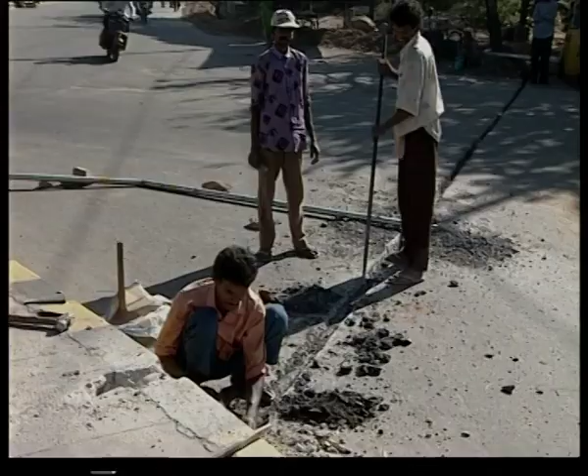Due to rapid industrialization and migration of people from rural areas, cities have grown phenomenally, leading to an enormous increase in urban population. The municipal authorities are finding it very difficult to provide basic necessities, especially water, to these multitudes. Whether a city rises skywards or spreads horizontally, the demand for water is bound to increase.

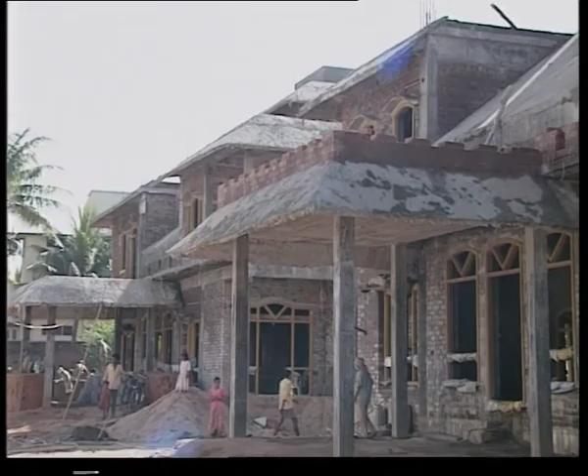Addition of one more industry or yet another residential colony to the already strained water supply system of the city will be like the proverbial last straw on the camel's back. When the system fails to cope, individual house owners start rigging up bore wells.

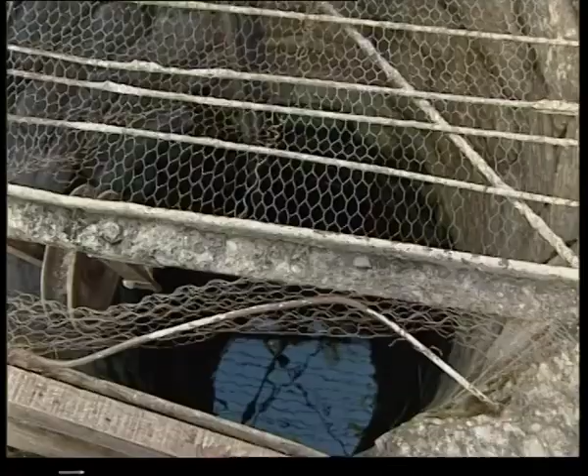In normal conditions, groundwater gets recharged naturally. During the rainy season, rainwater percolates into the ground and replenishes the water table. A replenished water table provides sustenance to open wells and surface water bodies. When we have more bore wells, more groundwater is pumped up.

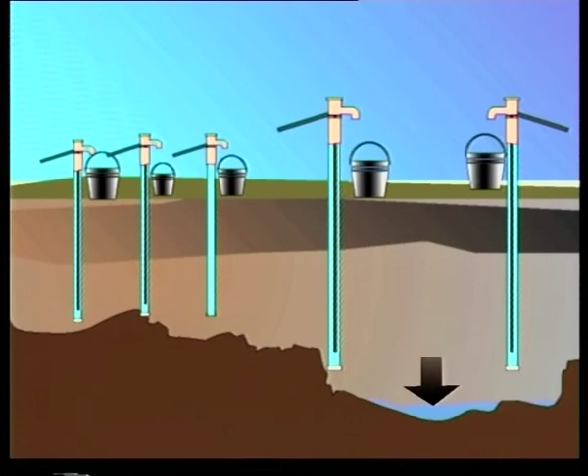When it is overexploited, the underground water level drops substantially, and natural recharging of groundwater fails to replenish it.

Urbanization has added yet another dimension to the problem. More and more open spaces in towns and cities are getting cemented, concretized or bituminized to form roads, pavements, runways or parking lots.

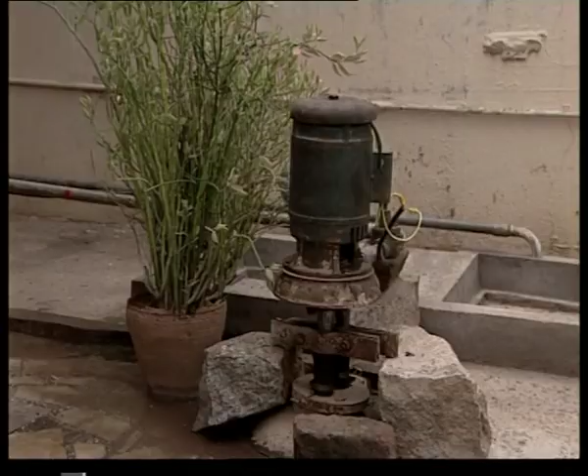Cemented or bituminized surfaces do not allow runoff rainwater to percolate into the ground. Due to this, the quantum of natural recharge of groundwater gets reduced considerably. As a result, bore wells fail to yield any more water and the open wells go dry.

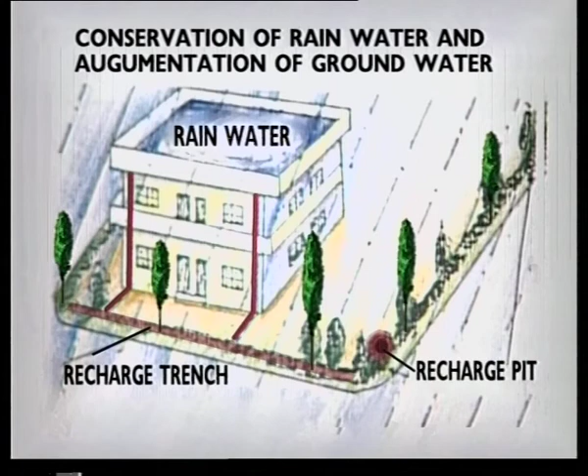The majority of our urban areas are facing this problem at present. To overcome this, the Groundwater Department in Andhra Pradesh has initiated a project to artificially recharge groundwater. Artificial recharge means augmenting the natural percolation of rainwater into underground formations by man-made methods.

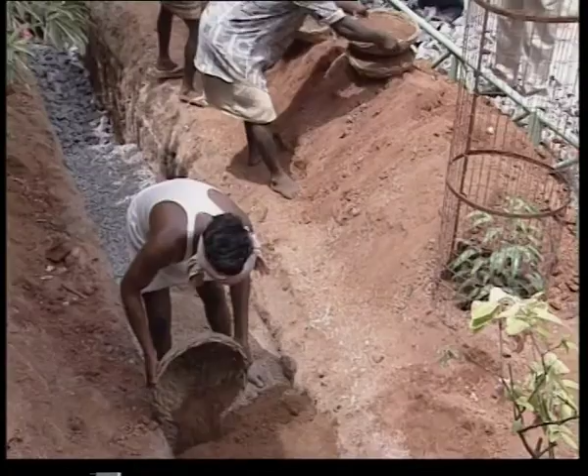The Groundwater Department is implementing this project in collaboration with the Hyderabad Metropolitan Water Supply and Sewerage Board and the Department of Municipal Administration. A simple and low-cost method which can be adopted even by lay people is being popularized to recharge groundwater. In urban areas, large quantities of rainwater get collected on the rooftops of buildings.

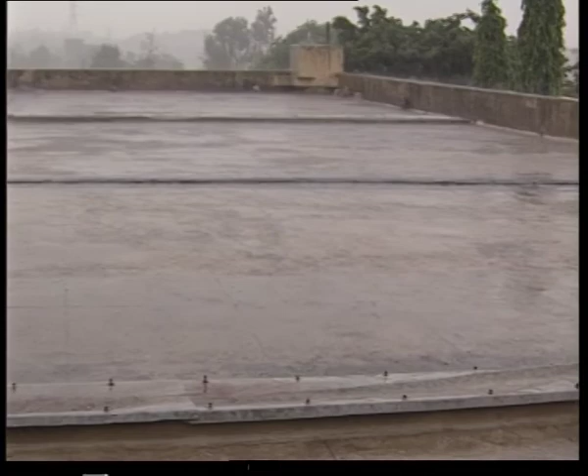Usually, the rainwater collected on the rooftops is allowed, literally, to go down the drain. Instead, this water could be used to augment groundwater recharge.

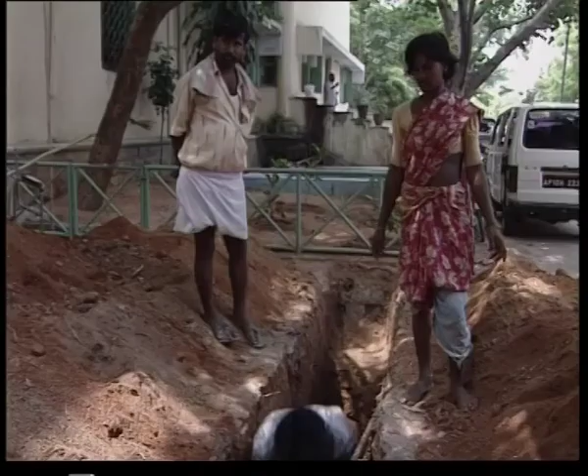Digging longitudinal trenches around the buildings will facilitate artificial recharge. Trenches 0.5 meter to 1 meter wide and 1 to 1.5 meter deep will be adequate for this purpose.

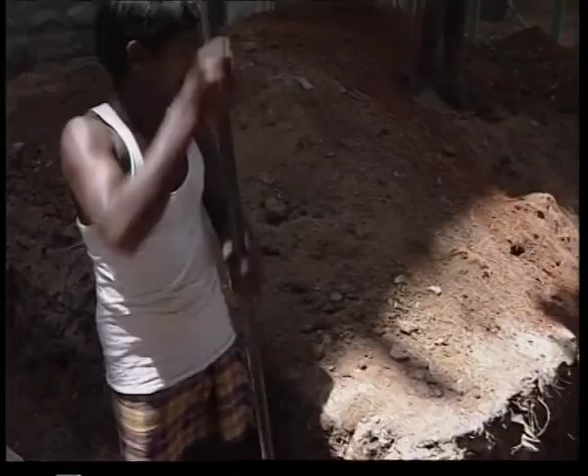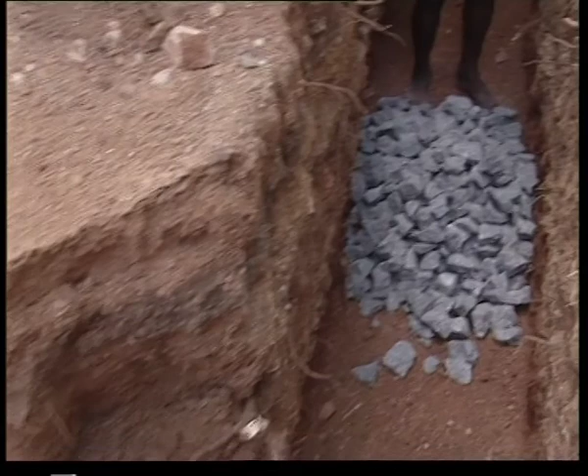Ideally, the trenches must be filled with 3 layers of permeable material. Pebbles of 40 mm metal can be used to fill the bottom layer, which should fill about 50% of the trench.

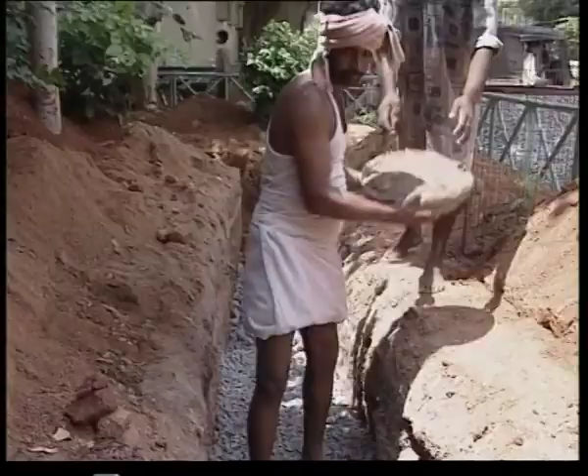The second layer must be filled with gravel or 20 mm metal, filling up to 25% of the space in the trench. The remaining part of the space can be filled with river sand.

The rainwater collected on the rooftop can be allowed to flow into these trenches. These trenches store the rainwater and facilitate percolation of water into the ground. For every 100 square meter rooftop area, a trench with a volume of 6 cubic meters will be sufficient.

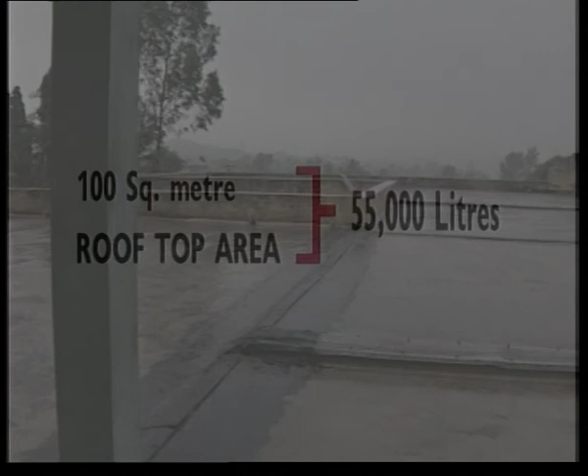The annual rainfall in Hyderabad is around 780 millimeters, wherein a rooftop area of 100 square meters can generate an estimated 55,000 litres of additional recharge. This is likely to meet the water requirement of a 5-member family for about 100 days in a year.

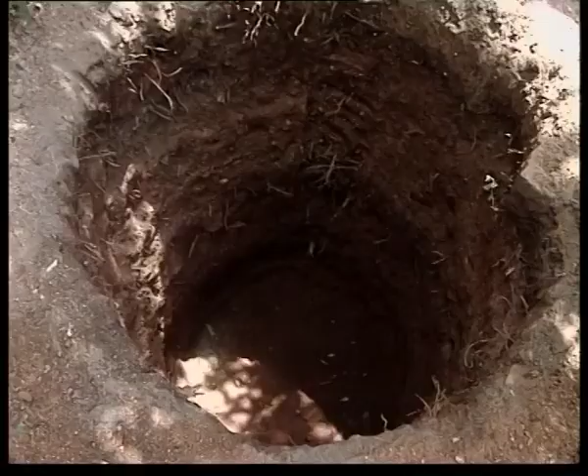Recharge pits of 1 meter diameter and 2 to 3 meters depth can also be dug adjacent to buildings. Rainwater collected on the rooftop can be allowed to flow into these pits. Filled with permeable material like pebbles, gravel and sand, these pits will be equally efficient as longitudinal trenches.

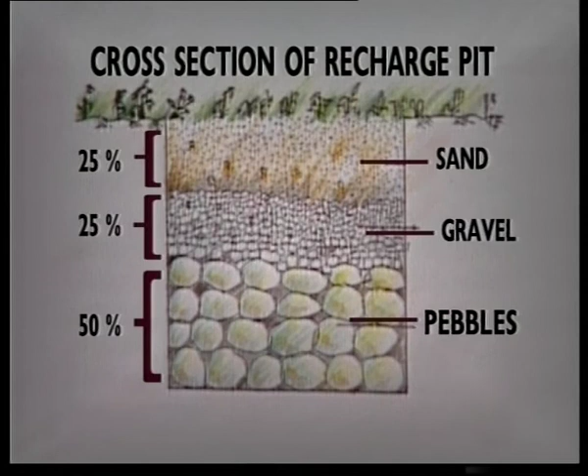In Hyderabad, the capital city of Andhra Pradesh, rooftops of several government buildings are being used for harvesting rainwater. This is one such building complex which houses the offices of the Commissioner of Agriculture.

Mr. Ajay Kalam, Commissioner of Agriculture, Andhra Pradesh, says: "We are all concerned about groundwater table depletion all over, and especially in urban areas. Today, in certain pockets of the twin cities, people go as deep as 500 feet in order to strike water."

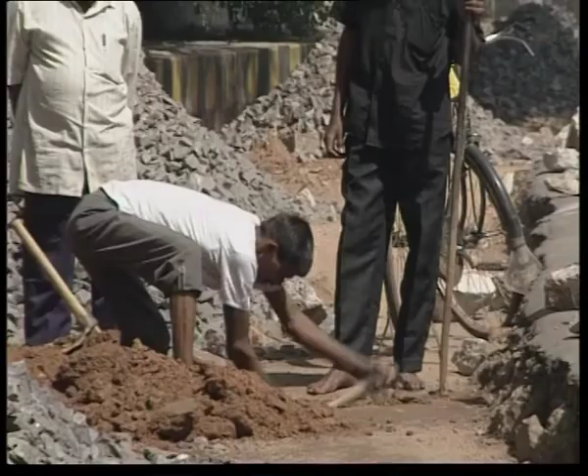"This is mainly because of concretization, which is associated with urban areas. When you concretize the ground available, the surface that is available, it's very difficult for the water to penetrate into the soil and the water table to get charged."

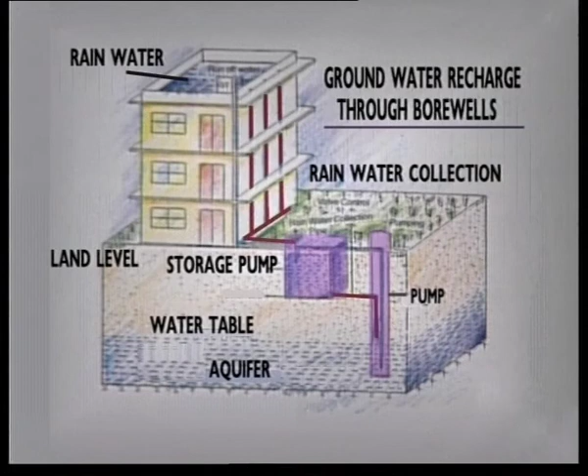"Keeping this specific problem in mind, the Government of Andhra Pradesh has designed certain schemes and programs, and one of such programs is to collect the water, both runoff and rooftop water, through some kind of infiltration structures. As a part of this program, we started a demonstration structure in our own office by collecting water from the rooftop."

At the headquarters of the Andhra Pradesh Special Police Battalion, rainwater is being used for artificial recharge through trenches which are in use all round the buildings.

Officials of the Groundwater Department are persuading the authorities of educational institutions to adopt this project of artificial recharge through rainwater harvesting.

Some institutions like the St. Francis College for Women have already started using longitudinal trenches for recharging groundwater.

Residents of multi-storied buildings are also being encouraged to participate in this project. If you are a resident of a multi-storied building, all you have to do is make trenches all around your building and then direct the collected rainwater into them.

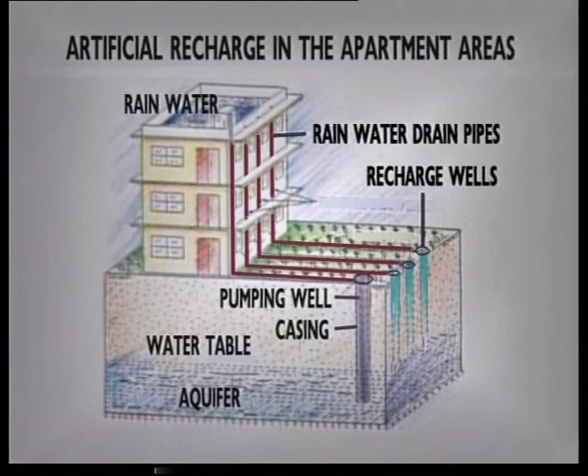Professor M.V. Naidu, a resident of this apartment house, says, "We had this problem of water from my own experience as a scientist. That's how we induced the builders to build this recharging system about 2 years back. Last year it was reasonably all right, but then this summer we had a very severe problem."

"And then soon after the very first rains, we found the water level increased because this recharging system we had developed on both sides of the building and the 2 pits on the front side. And as a result, we had to stop also the tanker supply, and we are now continuing to be self-sufficient with the bore water as per the normal requirements of the complex."

If you own a single or double-storied house, you can also adopt this method and harvest rainwater. All that you have to do is direct the rainwater collected on the rooftop into the trench through a pipe.

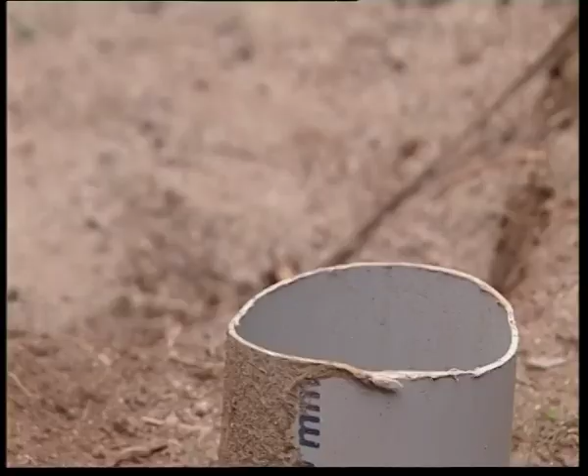If you have a dry bore well on your premises, direct the rainwater into that. It is likely that your dry bore well may start yielding water once again in the near future. Mr. Seshagiri Rao, a house owner, did just that.

He says, "The Director of the Groundwater Department was good enough to depute his team, who came and gave a lecture to the residents here. They also gave leaflets printed in English and Telugu, which gave the details of what should be done in every residential area."

"After that, we ourselves went there, and the technical personnel, experts of the groundwater department, came to our respective houses. One of those is mine. He came to my house and saw the stormwater drainage system, and advised us where the soak pits should be dug and how they should be dug, at what locations where the water can be trapped."

"And within 2 weeks after we dug up these trenches, the bore got charged, and today we are mostly depending on the bore. We hardly use a water tanker, on which we used to depend for almost 2 years. We're quite happy with the system, and we feel that scientifically this should be an acceptable system."

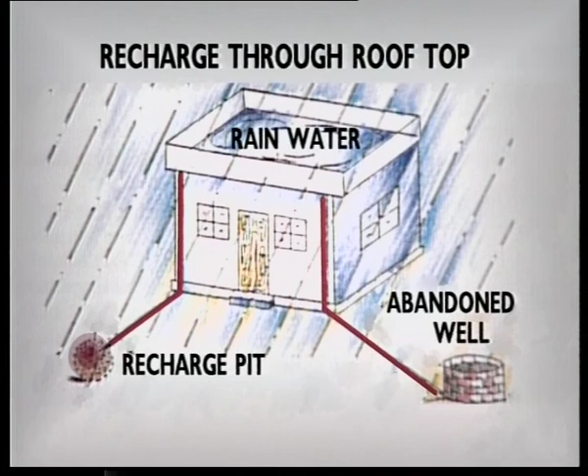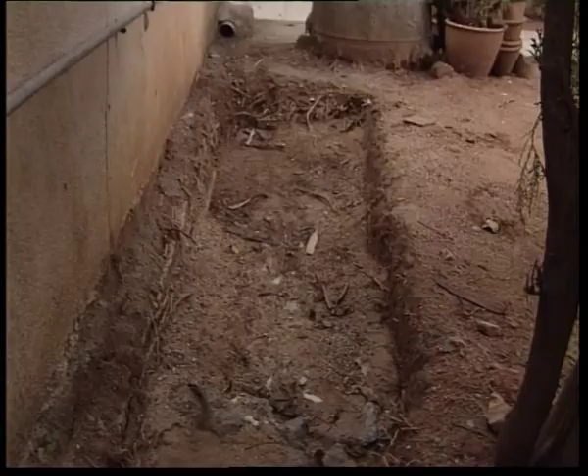Rainwater collected at other places normally flows into the storm drains. Instead of that, storm runoff water can also be utilized for recharging groundwater. These waters can be diverted into trenches or pits constructed around parking lots, municipal parks and playgrounds.

Dr. Babu Rao, Director, Department of Groundwater, Government of Andhra Pradesh, who initiated this project in the state, says, "Government of Andhra Pradesh has also taken a serious view on rooftop collection, road top collection and artificial recharge methods in urban areas to satisfy the needs of the people."

"In this direction, our Honorable Chief Minister, Sri Nara Chandrababu Naidu, has organized a seminar involving all the departments utilizing the water and also the urban authorities."

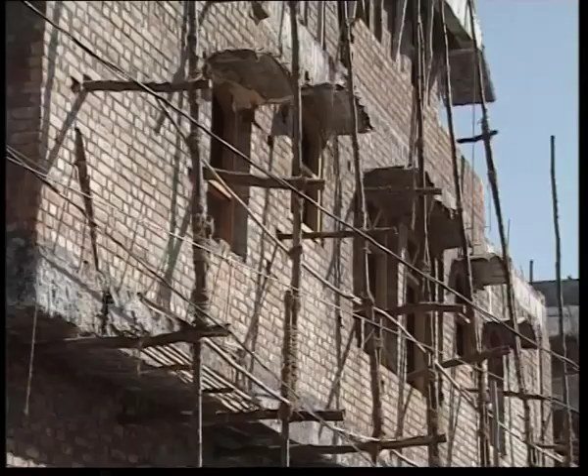"Looking into the dimensions of the problem, recently the Municipal Administration and Urban Development Authority has issued a GO wherein a fresh house plan has to incorporate rainwater rooftop collection, and only then will the house plan be sanctioned."

"We are taking up these activities - rooftop collection, road top collections, open area collections - and in all these places groundwater will be impounded into the subsurface aquifers by artificial means."

"The methodology, either pits or trenches, can be utilized for the recharge of groundwater, wherein the filter media will be filled in, water will be allowed to percolate into those pits and trenches, and water will be filtered, and fresh water potable for drinking water standards will be accumulated."

By participating in this project, urban residents will be doing a favor to themselves and to the community. So, conserve rainwater, recharge groundwater, and help yourself.